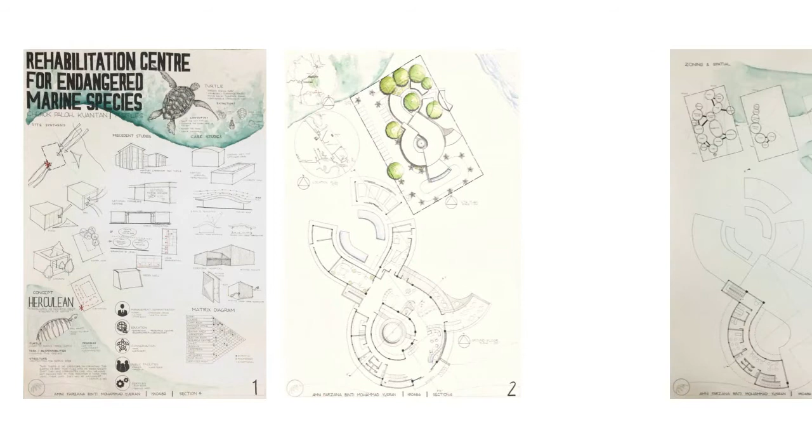Yusran, and I will present my final project, which is the Rehabilitation Center for Endangered Marine Species. Turtles are one of the endangered marine species in Malaysia, which are becoming extinct mostly due to human actions. Therefore, they need to be conserved and protected.

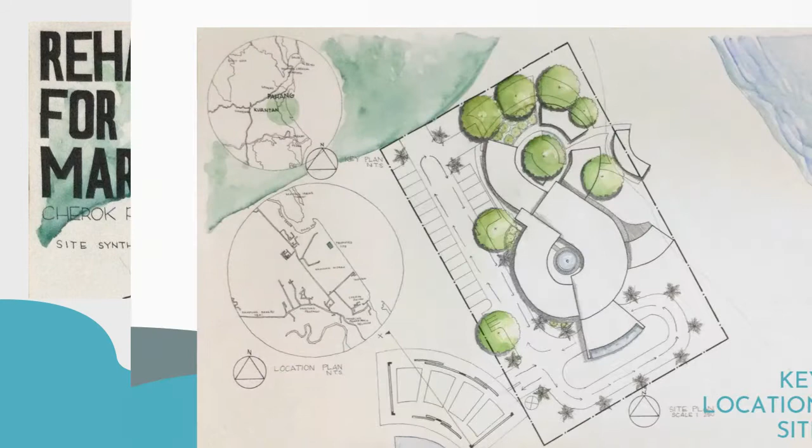So, the site assigned for the Turtle Rehabilitation Center is Site C, located in Kampung Cherok Paloh, Kuantan. For the site synthesis, the site received the best view on the northeast side.

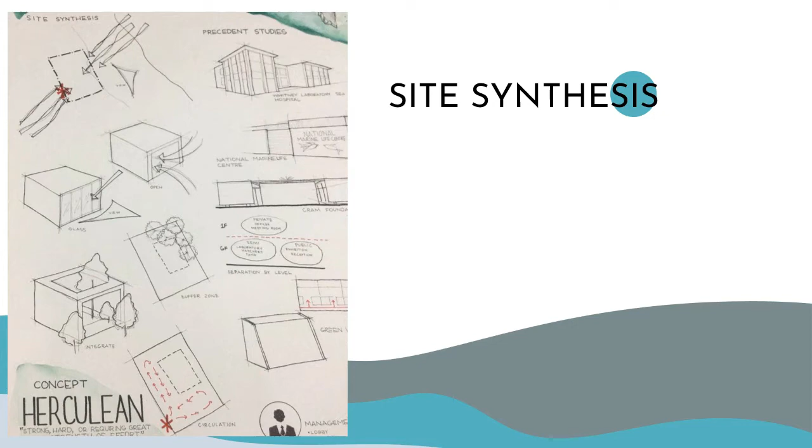Therefore, having an open space and using glass could allow visitors to enjoy the view. Planting more trees in the north will help as a natural buffer zone. Integrating the building with plants inside and outside, the circulation should be near the entrance.

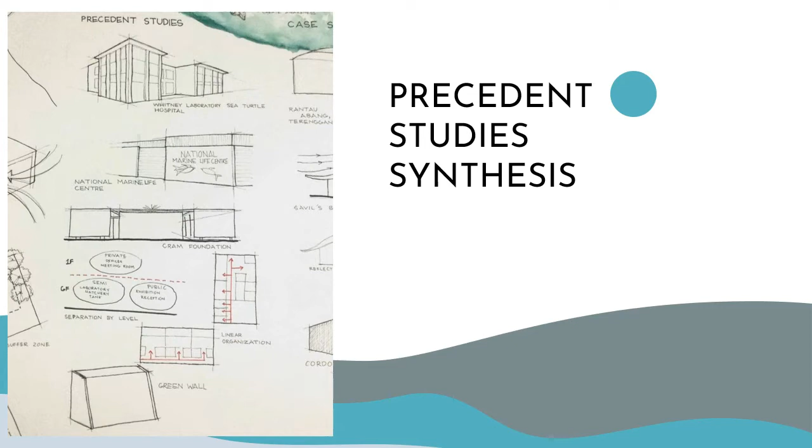Precedent studies have been done by studying three buildings: Whitney Laboratory Sea Turtle Hospital, National Marine Life Center, and CRAM Foundation. From these buildings, I found that separation of privacy could be achieved by separating the level, using linear organization, and having a green wall.

For the case studies, the best material for the hatchery area is a shading net, while concrete is the best material for the pond. Having a curvy roof could reflect more solar radiation and maintain a low indoor temperature.

A secondary skin facade not only gives an impressive touch to the building, but also acts as a shading device and could help regulate low indoor temperature.

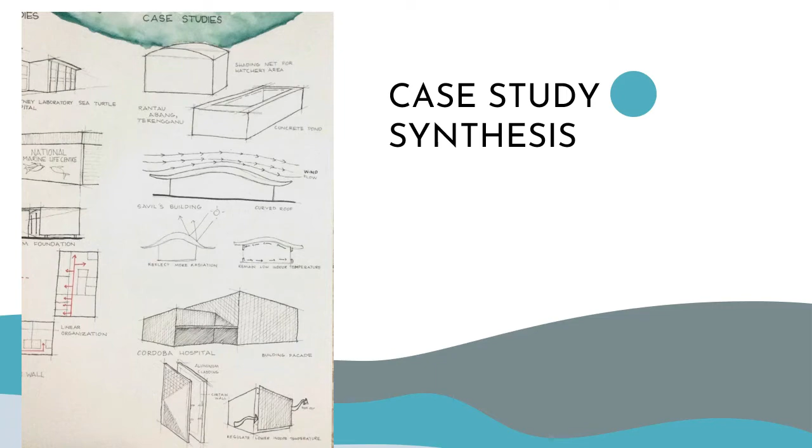My concept is Herculean, which means strong, hard, or requiring great strength of effort. It is inspired by the turtle shell skeleton, and refers to the structure of the building which protects the people inside.

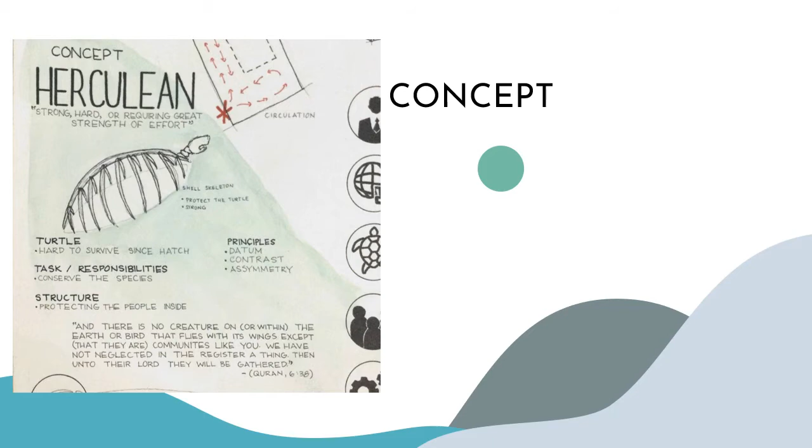It also means the difficulties turtles face in surviving. Not only that, it also refers to the heavy responsibility of conserving this species, because turtles are also Allah's creation. It is our responsibility to conserve and do good deeds in this world.

The spaces provided are based on their functions: management or administration, education, conservation, public facilities, and services. This is the matrix diagram that shows the essential, preferred, and exceptional spaces.

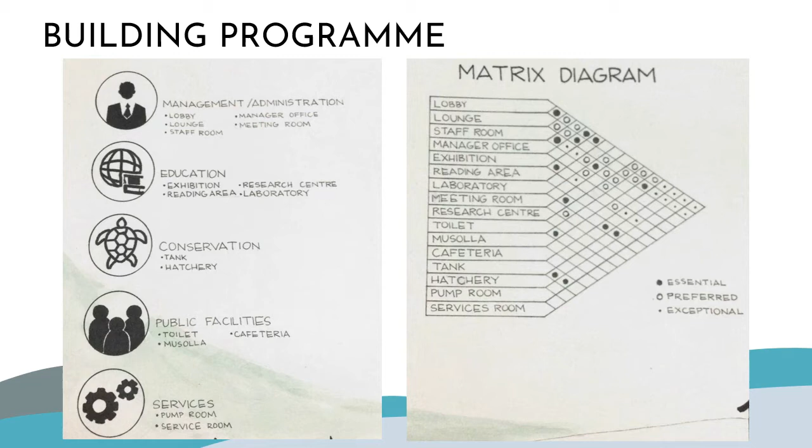Moving on, as we know, the site is located in Kampung Cherok Paloh, Kuantan, near the NSM. The zoning is determined by the neighborhood context: public, semi-public, and private. The first floor is for the private area.

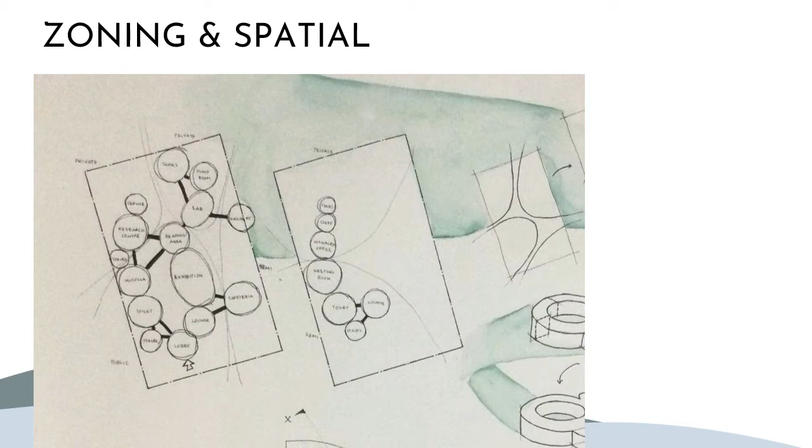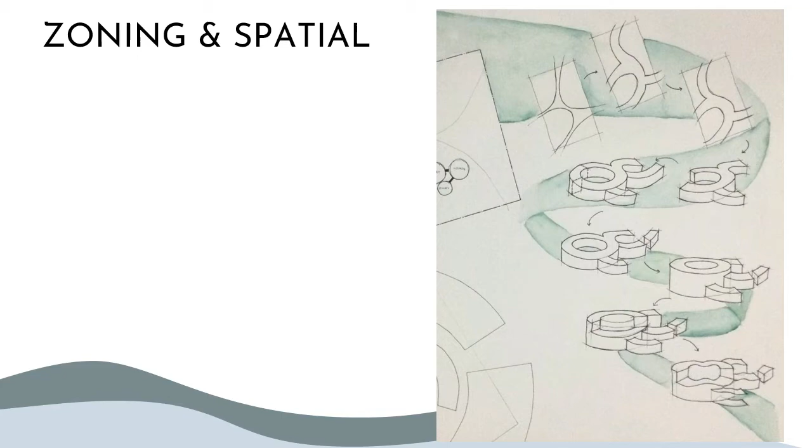So the design starts from the zoning division, then is developed by connecting two parts and adding another space. Then some parts were lifted for double volume space and a first floor. Half of the space is lowered to have a lower ceiling. Lastly, an open space faces the view, and the roof is modified to be curvy.

From the site plan, people could enter the site from the southwest and drop off passengers at the main entrance, then go to the parking. For services purposes, vehicles could park here, which is near the services room.

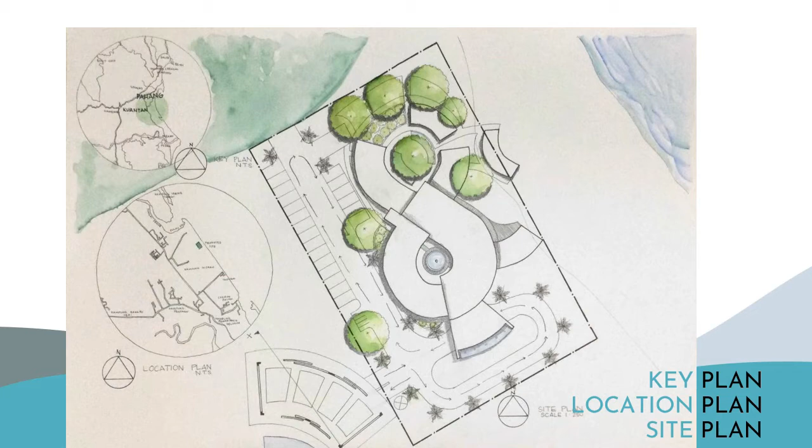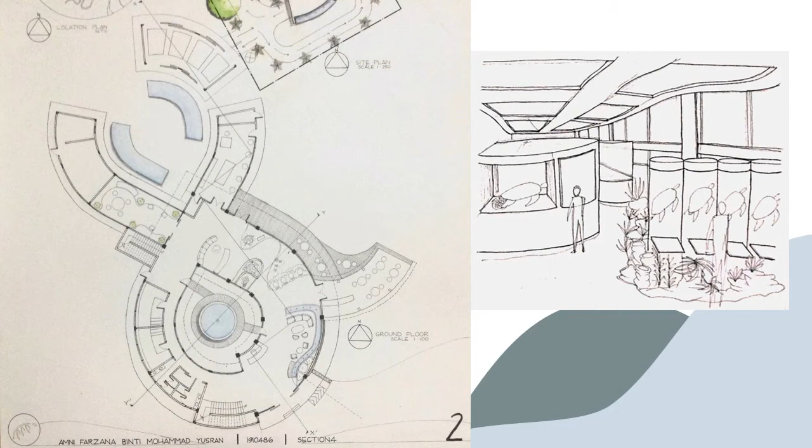Going on to the ground floor, the visitor could be entertained at the lobby and rest with an indoor waterfall inside. They could also go to the courtyard or open cafeteria from there. Then, they could enjoy learning by exploring the exhibition space and reading at the reading area. From the lobby, they could also access the toilet and musala.

The staff or researchers can access the research center and laboratory for research purposes. Tanks are located near the laboratory. Services are provided behind the research center, and the pump room is beside the lab.

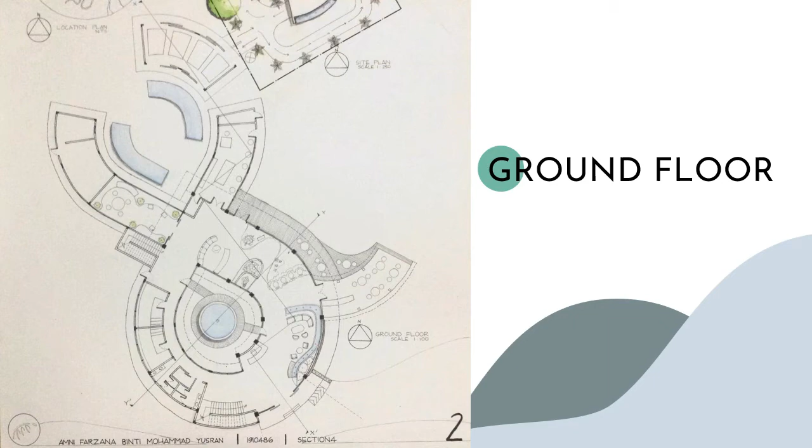Moving on to the first floor, after climbing up the stairs, the staff lounge can be seen, which is near the toilet. Next, the meeting room, manager office, and staff room. An emergency staircase is provided here for safety purposes.

This is how the building looks from the gate entrance, and the view towards the building from the sea. This is the final model of this project.

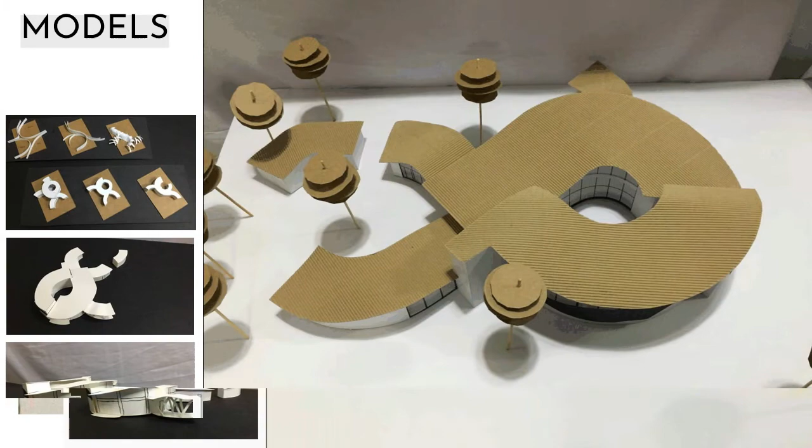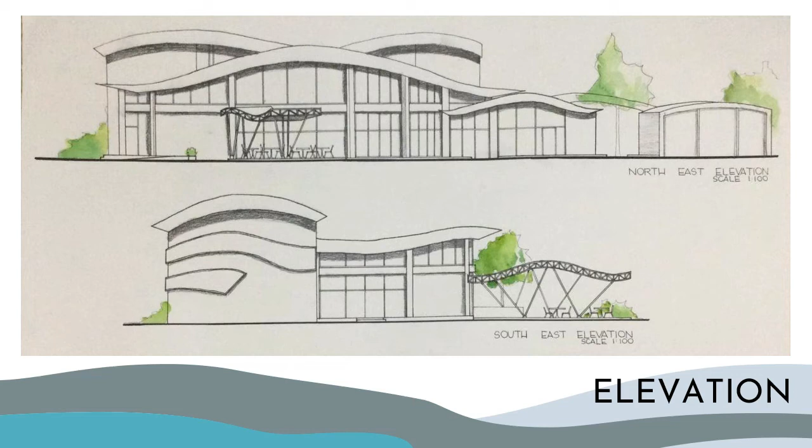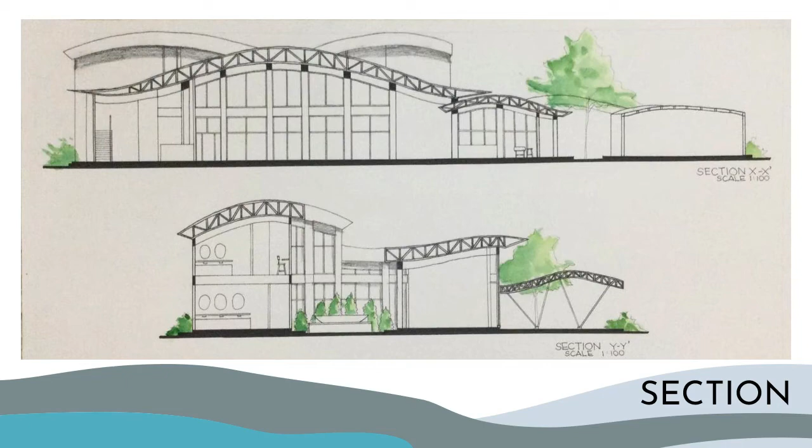Next, construction details, which use a column and beam structure. The details shown were at the lounge area, which has a waterfall wall and a green wall on the other side. The foundation used is a deep foundation with concrete piles connected with a two-way concrete floor slab with vinyl flooring on it.

Concrete masonry is used as the wall cladding, with concrete for the waterfall wall. Inside the concrete, there is pipework which allows water to pump up and fall to the water table. On the other side, a green wall unit is used to hold the plants inside.

Next, the wall is connected with bowstring steel trusses by the beam and metal plate. Insulation is installed between the purlins before it is layered with a metal deck roof.

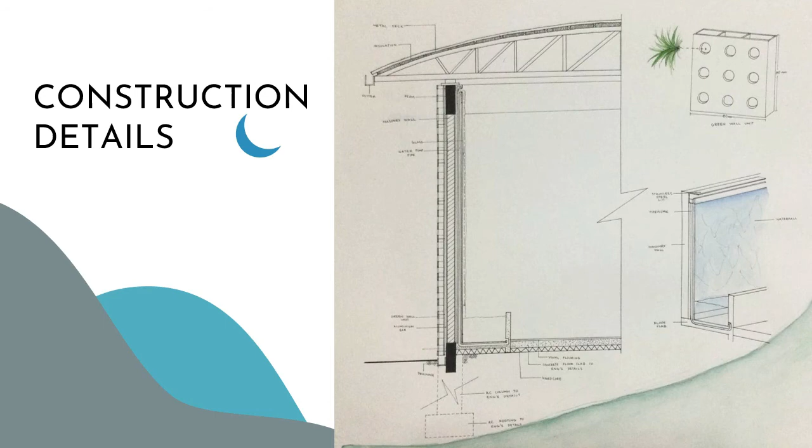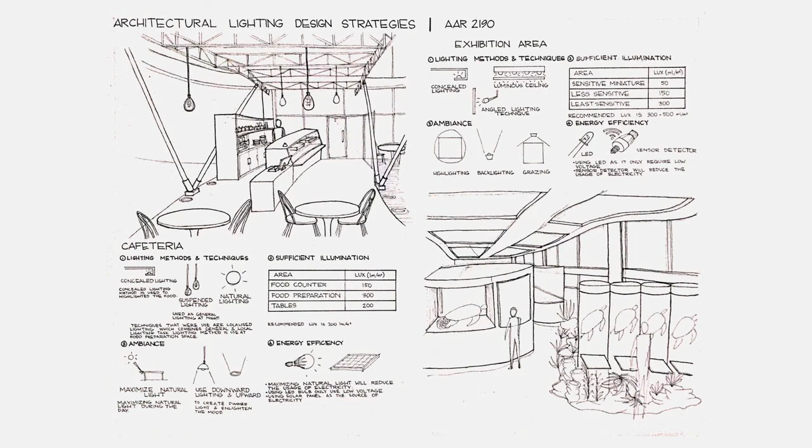Lighting has been studied in two spaces: the cafeteria and exhibition area. The lighting methods and techniques used are concealed lighting at the food storage and cabinets, suspended lighting at night, and natural light during the day.

Task lighting technique is used in the food preparation area. The recommended lux for sufficient illumination is 200. In creating ambience, natural light is used, along with downward and upward lighting. For energy efficiency, maximizing natural light and using LED bulbs helps reduce electricity use.

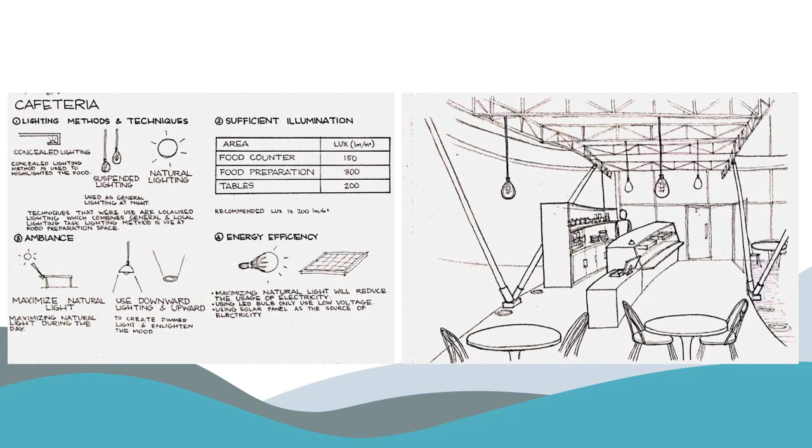Next, the exhibition area used concealed lighting and a luminous ceiling as methods. An angled lighting technique is used to read the information boards. The recommended lux for sufficient illumination is 300 to 500.

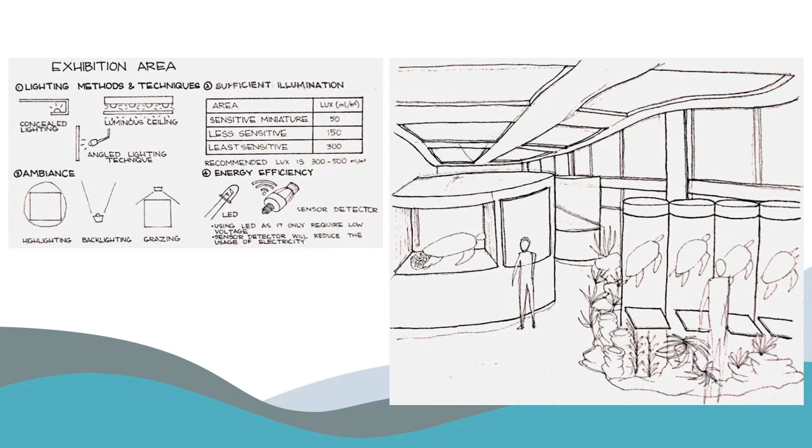Highlighting, backlighting, and grazing are used to create ambience. As for energy efficiency, LED and sensor detectors are used to save electricity. That's all from me. Thank you.